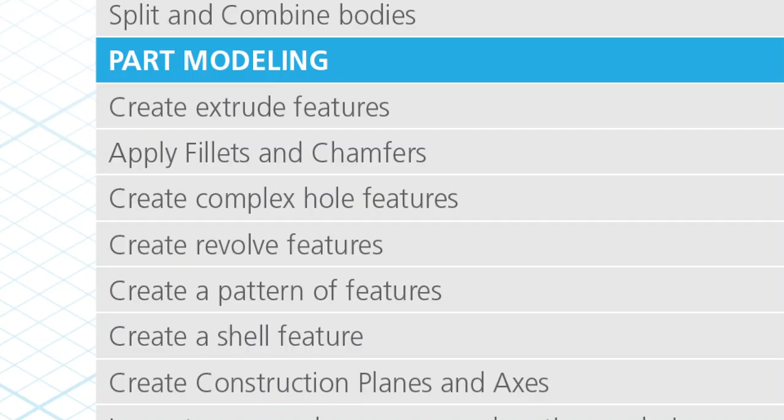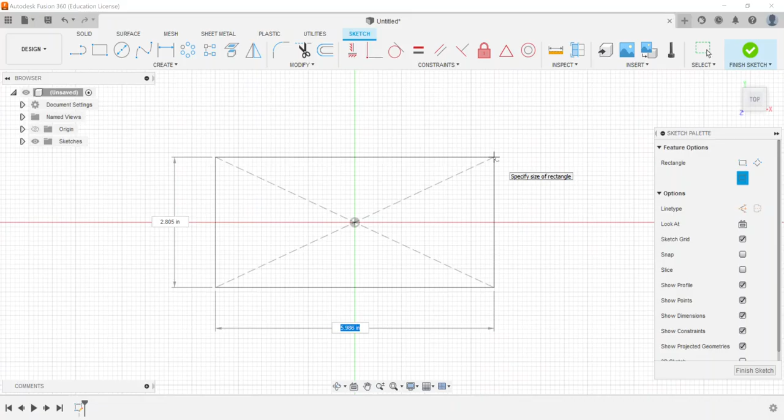So as we get into Fusion, I'm going to go ahead and just create a sketch. And I'm not going to worry about creating a component in this case. I'm just going to go ahead and set it on this top plane. And I'm going to go ahead and create a center rectangle right on the origin. And I just want to give it some dimension here. So maybe a 6x3 just to have it constrained. I'm going to finish it.

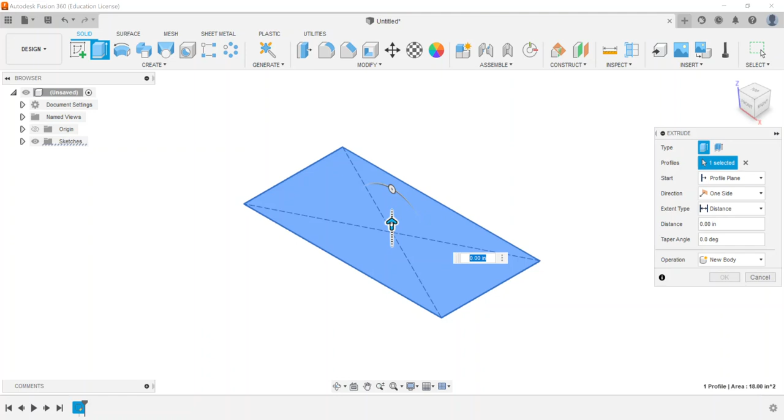And this, we're just going to take a look at the extrude menu and some of the options. So when I click extrude, I can do a few different things. One, with creating extrude features, you can use the graphics area. You can either click and drag the arrow. You can type in a specific distance. And those are some of the options. You can also type it over here in the dialog box on the right side.

So you have a few different options. One, you have the extrude option. You also have the thin extrude. For this one, we're not going to worry about thin extrude, so it's only going to cover extrusions. And we're going to start with the profile plane. We could go with an offset or to an object, but we're going to just stick with profile plane because it's the most common one done.

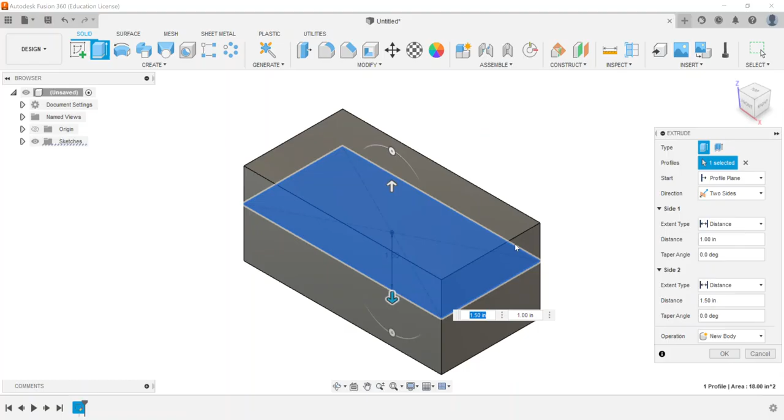Direction is one side. We could do a two-sided extrusion, which would do something like this. Or we could do a symmetric extrusion, which would be that if this is 1 inch, that means that there's a 1/2 inch of material on each side of the sketch that we have set here. So you can kind of see what that would look like.

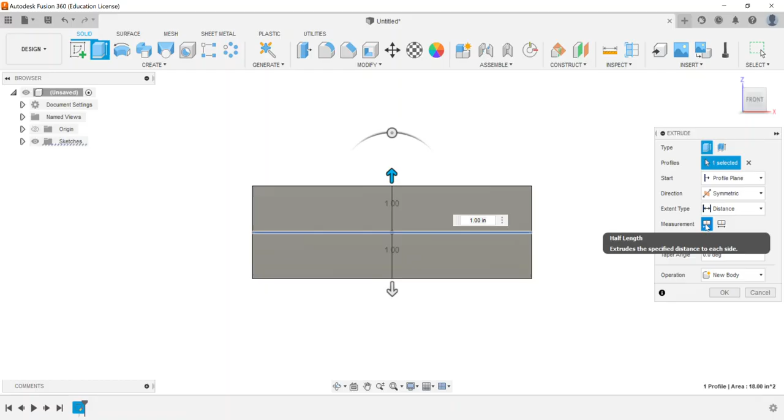Actually, it's 1 inch looking at the whole thing, because down here in the measurement, we have it set to half length. If we do the whole length, that's what 1 inch total would look like, or 1/2 inch on each side. If we do half length, as noted by the little icons, it's going to be 1 inch going up, 1 inch going downward, total of 2 inches there. So that would be symmetric in utilizing those.

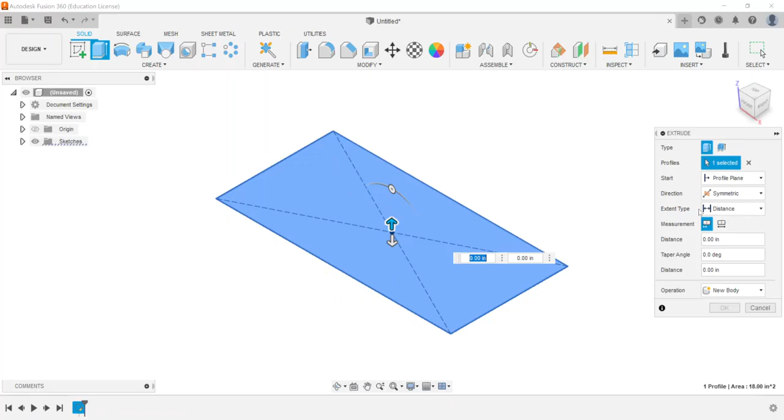Extent type is distance, or we could go to all, since there's nothing else there. So a lot of times all gets used for hole extrusions and things like that, or anytime you're extrude cutting something away. But for example here, I'm going to extrude, let's do a one-side extrusion, and we'll go up about 1 inch. And I'm going to go ahead and say okay.

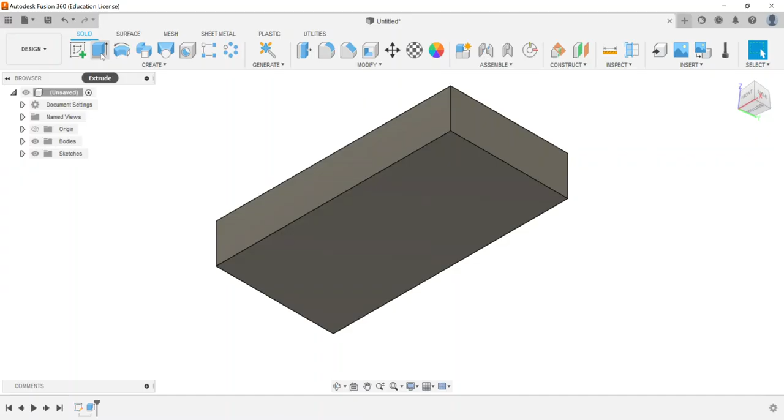Now, the one thing about Fusion is I'm going to rotate below here. If I click extrude again, either I can use a sketch, or I can always click on a face and continue to use the extrusion, and you'll notice there's going to be no line of separation here. But I'm going to extrude this down maybe about another 2 inches.

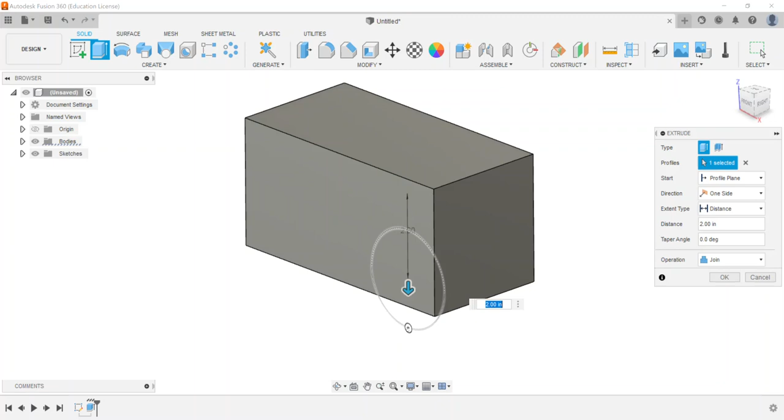And the other aspect of this is going to have the operation of doing a taper. So the taper, you can grab the little grip to have something like this, maybe a -20 degrees. You can enter it in here in the dialog box. But this grip also allows you to specify a certain taper angle for your extrusion. So I'm going to do a -20, and we're going to have it be a join operation. I'll go ahead and say okay.

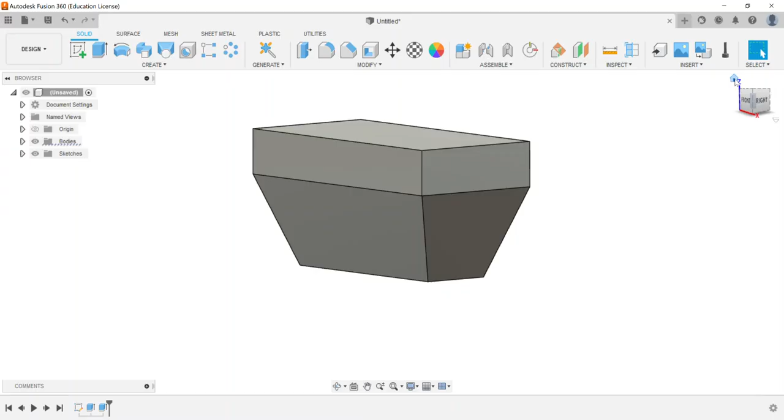So this will go through there, and we're going to see the line, and we're going to be able to see that kind of taper that happens there. Now, the other thing that we can do, so I'm going to go ahead and create a new sketch on this top face.

And we'll do a circle here, and let's say, just for the sake of it, we'll do a square on this side. So I'm not going to worry too much about putting in dimensions, but in general, we want to go through and have fully dimensioned sketches to work with. But I'm going to go ahead and run extrude again.

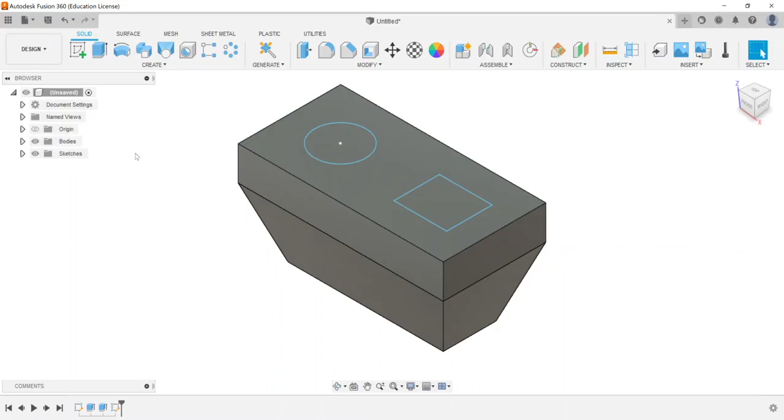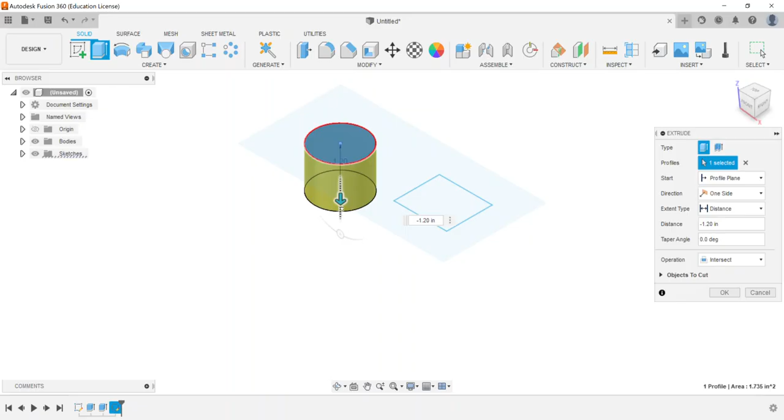And when I go to do that, let's say I want to click on the circle and have it go down into the part. So as I create the extrusion, you're going to notice the operation is going to be set to cut. Or I could do an intersect, which the intersect option, you can see it got rid of everything but the cylinder as far as how far it would go down. And here you can see if I keep dragging, it's only going to give me the cylinder that intersects.

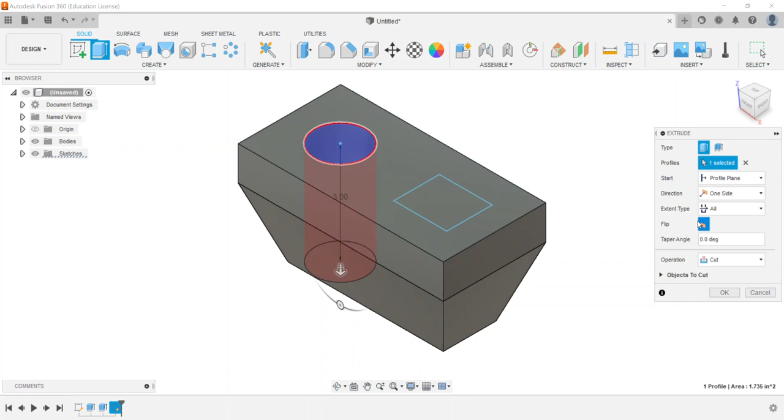So I actually want to do a cut operation. So I want it to cut like a hole all the way through. So that's where, instead of a distance, we can choose all, and that would automatically pick up the total height. It's a cut operation. We don't have a taper angle. And we could flip the direction. It's not going to give us anything because there's no material there. But if I flip the direction, I could do that as well. And I'm going to go ahead and say okay.

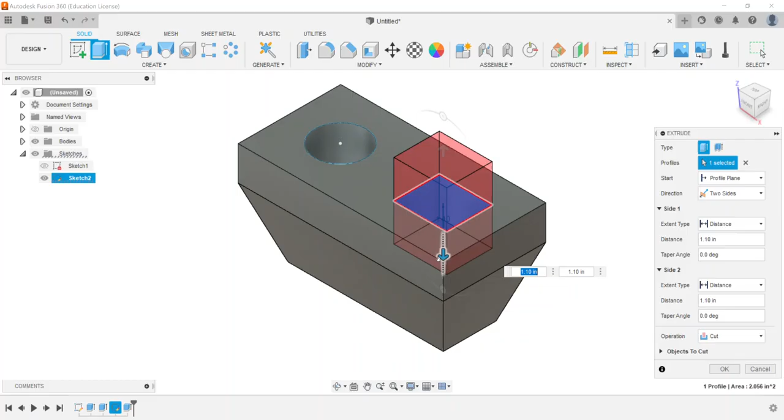So now here's some things that will kind of happen, is that if you open up the sketches folder, you can turn the sketch back on by toggling the visibility. And let's say I want to extrude. I want to create now a two-sided extrusion. And I want to extend this up, but let's say as I go down, I want to cut. So that's going to be the only thing, is that if I join, it's going to join in both distances. So you can see sometimes having to switch in your operation is going to be necessary.

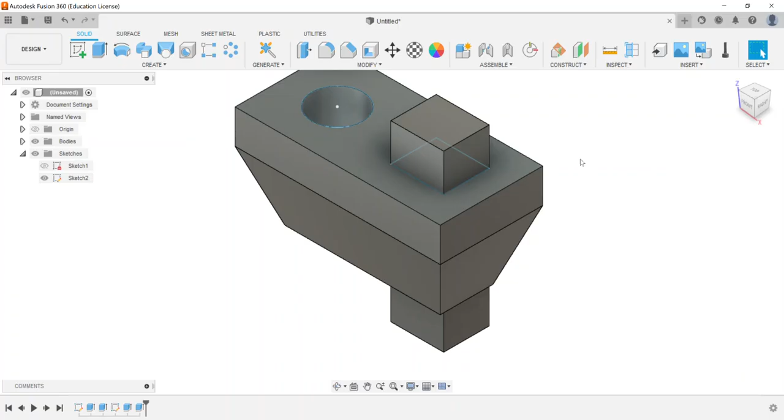But maybe I want this to stick up, maybe this to come down, and maybe I want it to extrude down past and go all the way through this part. So either way, as I'm punching it in, I can type it in for whatever units you have there. You don't have to worry about typing units. You can just go ahead and type the number that you wish to have. And we can say OK, and you'll see the outline of the sketch. If I toggle that off, you won't see it anymore.

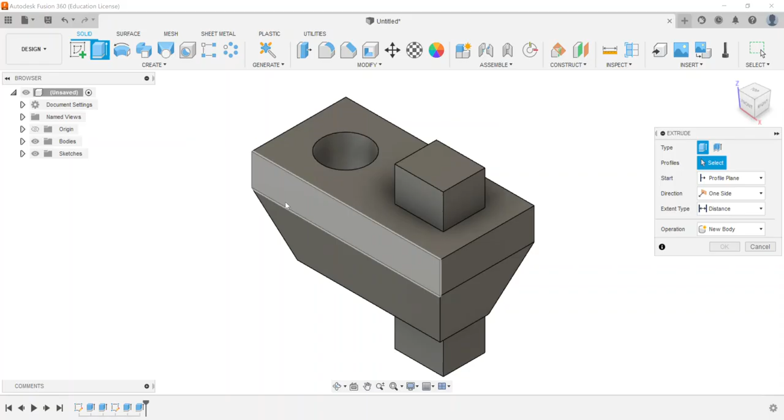So that's really, when it comes down to creating extrude features, a lot of the basics for the ACU exam. This extrude option is probably one of the most versatile ones that you use. So you can also have new bodies or new components created anytime you create that as well. So for example, if I go to create a new component, I can go ahead and extrude this out and then say OK, and you're going to see that this component that I had set up, there's the only thing that was extruded, and that's a new component. So those types of things.

And then obviously from a previous video, you can also see that the body that was created in the earlier portion can be turned into a component by creating it from the body. So those kinds of settings are pretty familiar and pretty well known as you go forward into the ACU exam. But for the most part, a lot of basic extrusion features, just like the ones we covered here in this video, are going to be asked of you when you take the exam.

All right, so this concludes the video on extrude features for the ACU exam.